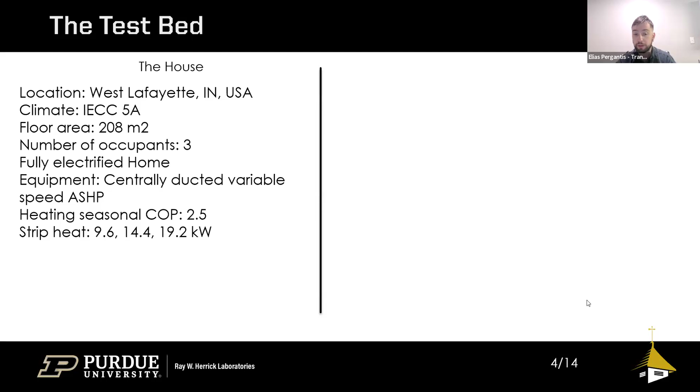This strip heat is used both for defrost purposes and for meeting the building demand. So when you go into defrost, strip heat is energized to meet the building load while the system is running in cooling mode. This is the house, and I'm sure some folks will also visit it over the weekend.

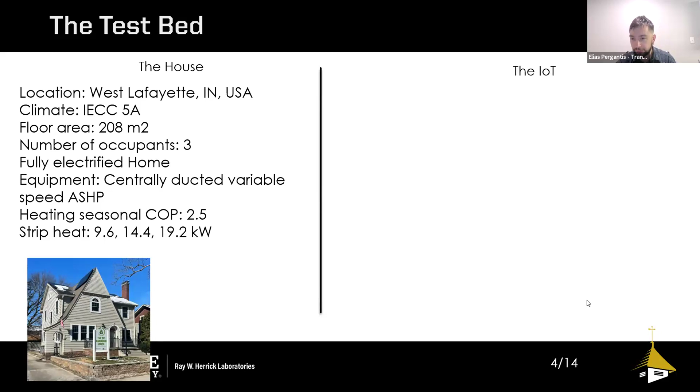In terms of the IoT infrastructure, these were the 3 main systems we used for the study. For training purposes, you really only need the electrical data and the thermostat measurements.

We had current transformers in the breakers to monitor all the different subcircuits via IoTaWatt. We had this Trane thermostat that reads humidity and temperature at a central location - this is the living room of the house, and I should say this is not a zoned building. We also had thermocouples and airflow sensors used to understand more broadly the thermal response of the building.

Those are intact. Once you have the sensors, we used Raspberry Pis for some of these, but for others, just through direct API communication, we were pushing the information to InfluxDB on an AWS server. This was used for data storage.

In terms of actively controlling the system, we could have run the optimization remotely on the server as well, but for monitoring and other privacy and control purposes, we ran this on a local computer, which solves the optimization problem and sends a set point for this specific problem. We've done other studies with water heaters and EVs, but for this specific study, it would decide the set point and push that to the thermostat.

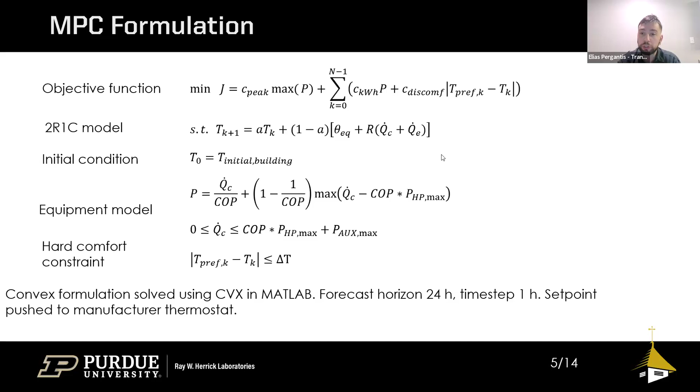We have a term for people's activities and model accuracy and other error terms all lumped into an exogenous term, and that's a support vector machine as a function only of outdoor conditions. In reality, it should really be a function of both indoor and outdoor conditions, but to maintain linearity and convexity, we have it only as a function of outdoor conditions. And that does improve model accuracy in capturing some effects such as solar gains and other things that we don't explicitly model as part of the main equation.

In general, we found that we were able to train the core RC parameters with significantly fewer days than this, but really we needed a longer period of time to train the machine learning portion of the model.

Especially because, I should mention, the occupancy - the reason we didn't use occupancy as part of the optimization is the house is more or less occupied at all times. It's not like a typical family home where maybe the people leave during the day and come back from work. Instead, we have occupancy most of the day.

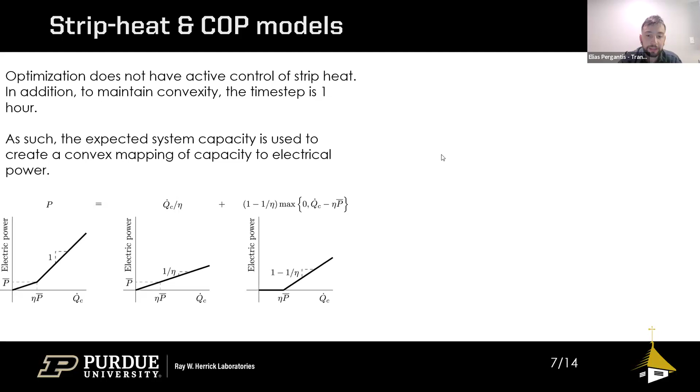In order to do that, we use the expected system capacity to create this mapping from thermal capacity to electrical power, and basically this is how it looks. We look at the heat pump portion, and then after the heat pump portion, we assume that the system is operating at strip heat power, which is at a COP of 1.

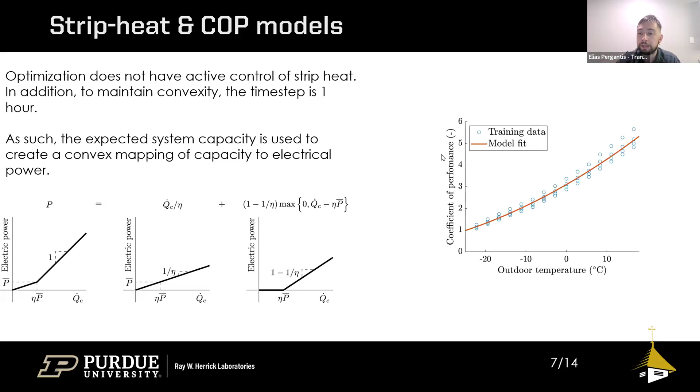In terms of the COP of the system, this is purely a function of ambient temperature, and we can see how it looks. The variation from the points is because of different indoor conditions. So we can see indoor temperature definitely does have an effect, maybe 10 or 20% COP difference, but the main trend is driven by the ambient temperature.

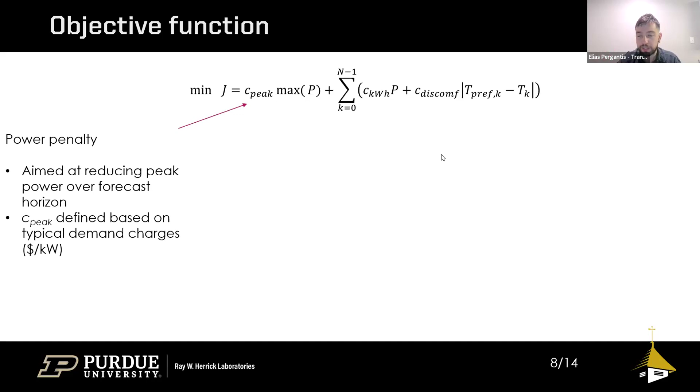Now, in terms of the objective function, we briefly covered this before, but we had 3 terms. First, the power penalty - this is not a real penalty that the utility has in place. It's based on typical demand charges, and the units are dollars per kilowatt, aimed towards softening the power profile of the system. Then we have the energy.

This is aimed at reducing the total electrical energy consumption. It's dollars per kilowatt hour, and it's defined based on local electricity prices, and it's a flat rate. There was no time of use present.

I believe it was, during the time of testing, $0.14 per kilowatt hour. And then lastly, for the discomfort, the absolute term is there in order to avoid deviation, both upwards and downwards, from what the homeowners really want. And the units are in dollars per degree per hour.

And the optimization basically needs to balance these three terms, and it's not trivial - how do you, especially the discomfort price, which didn't necessarily have physical units that we could easily tune.

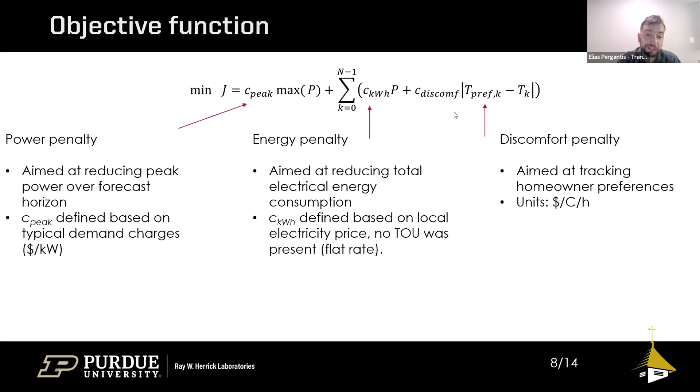To do this, we found that we started with some price, and then we found that generally, as the weather fluctuates significantly at the location, the optimization would not really honor the comfort aspects of the bargain at different weather conditions. So, because if this is tuned at, let's say, 0 degrees Celsius, and then we go to -10 the next day, you can imagine we end up trying to only solve for the energy portion.

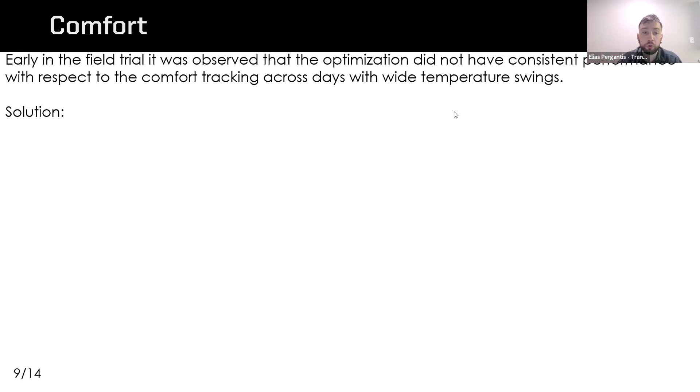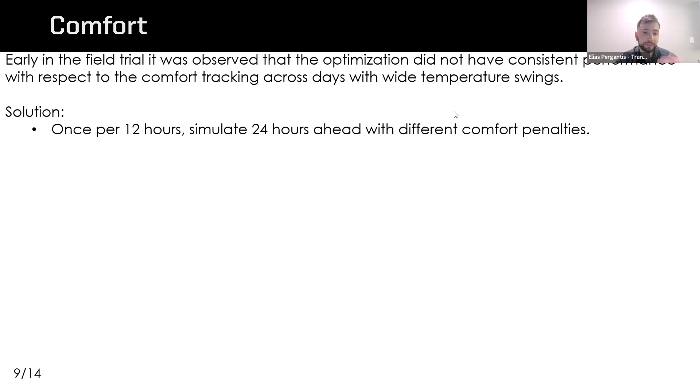So our solution to that: once every 12 hours, we would simulate the system with different comfort penalties, a range of comfort penalties. We can do this quickly because the problem is convex and solves very fast. It allows us to identify thermal comfort prices that ensure the indoor PPD is less than 10%. That's very important, that's generally what ASHRAE uses for comfort.

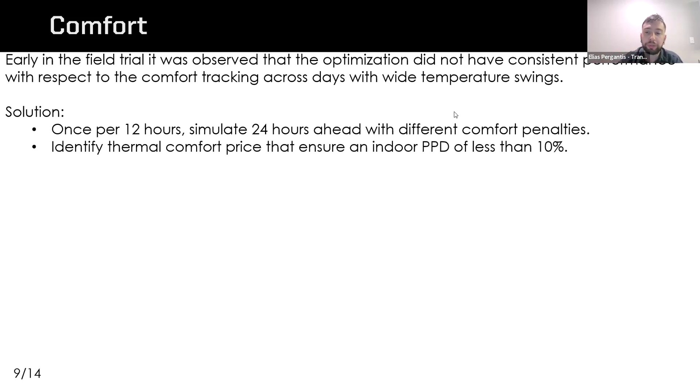We used some sample clothing and have some questions for the homeowners on that. This is how this looks on a cold day. We effectively sweep the thermal comfort price, and we can see the lower the thermal comfort price, the more the savings, but also the more the discomfort. We find the comfort price that ensures the PPD over the forecast horizon is less than 10%.

Likewise, we do this on a mild day, and we can see that the price is much lower, so we have more freedom to optimize. That ensures the controller is doing its best regardless of the weather.

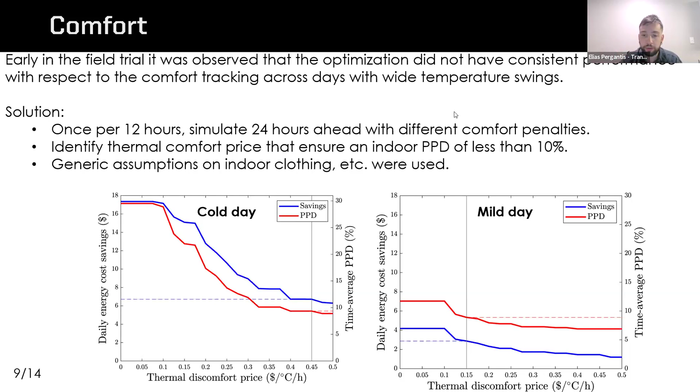How did the controller do? What were the results? I would say the controller learned two different things: one is to prioritize heating at milder conditions, and secondly, to recover from setbacks very slowly. Both of these you could do with a heuristic, and there are also smart recovery algorithms for that.

But a lot of the savings from the algorithm were just from slowly ramping up the temperature over a couple of hours with some homeowner discomfort, but being able to avoid using electrical energy, at least for indoor conditioning purposes, but occasionally for power purposes.

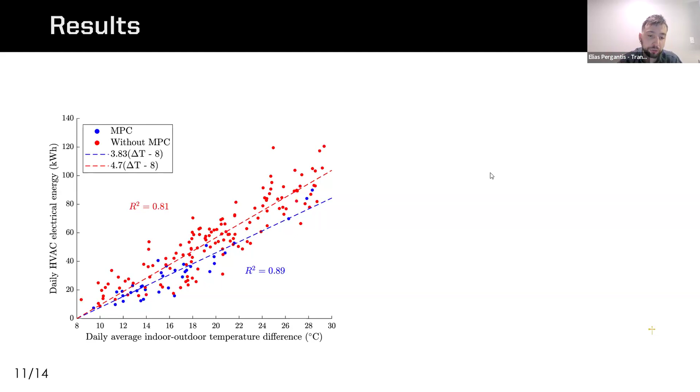Okay, so how did we do? We looked at the total HVAC energy, both heat pump and strip heat, and did a linear curve fit with indoor-outdoor temperature difference. Having some uncertainty in the slopes of these two models, we can do a Monte Carlo simulation of the relative savings between the two cases. And this is what resulted.

Effectively, we had expected savings of 19%, and then there's a distribution, largely driven by day-specific dynamics. The controller doesn't save as much energy on, for example, very cold days, because you don't have a lot of shifting potential versus milder days. That's why the savings vary.

In terms of the electrical power, this is the profile before MPC and after MPC, and we can largely see that without MPC we did use a lot of stage 3 electrical energy, whereas with MPC it's primarily stage 1 and stage 2.

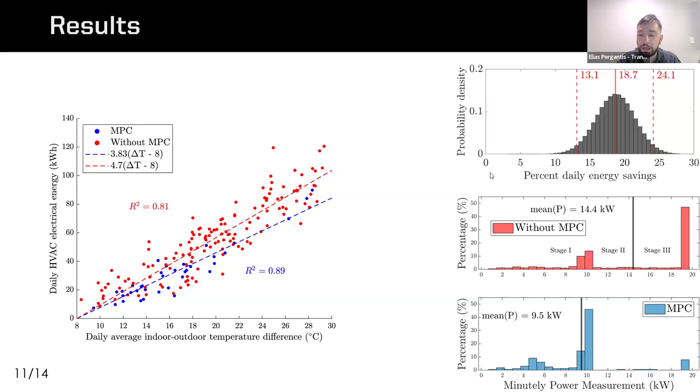Now, going into the summary slides and closing up the presentation, apologies if I'm going fast. In terms of development effort, the total project development time was 190 days, from when I started on this project until the controller was up and running. I should mention these were student days, so having courses and other things doesn't necessarily mean all of these days were 100% effort on this, but to give the rough schedule, the non-repeatable tasks dominated, and those were sensor procurement, server setup, sensor communication, and API related issues.

We did find that the manufacturer's thermostat was difficult to work with at times, and that is largely solved with open source. There are some open source thermostats with available APIs, as well as smart thermostats that allow this kind of features. Repeatable tasks, I would say, were related specifically to fitting the RC model for this house, and those I would say are between 4 to 5 days.

In the non-repeatable tasks, I should also mention the controller development and the model fitting development, but those you would only have to do for one house and they would scale. So the repeatable tasks are the much smaller portion, and they could even further be reduced. As mentioned, the caveat is that this is the first deployment, and there was some learning curve, which should be reduced in future iterations, as it was in other deployments we did.

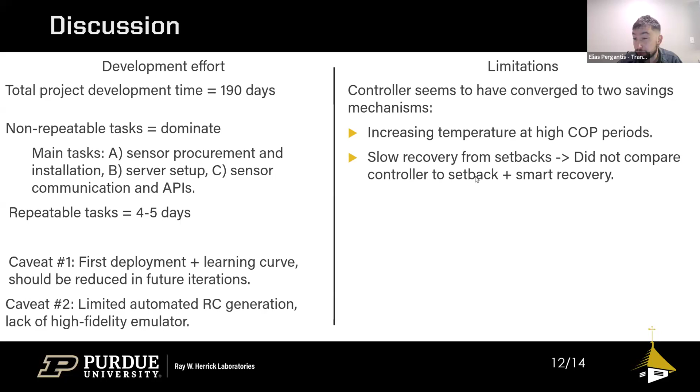This is important because there may be a heuristic there, either on the smart setback side or the temperature side, which we could have tested comparably, but we didn't find something readily available. It's something to consider in the future—some heuristic controller with simple rule sets, and how it would perform with respect to the baseline.

Unexplored effects: we found a significant reduction in the number of defrost cycles. These were demand-based defrost cycles, so the manufacturer monitors the coil temperature before triggering a defrost cycle. That was actually one of the main reasons we reduced electrical consumption, especially for the high stage strip heat.

We really couldn't understand this when the experiment was concluded, but we do have a physical explanation now.

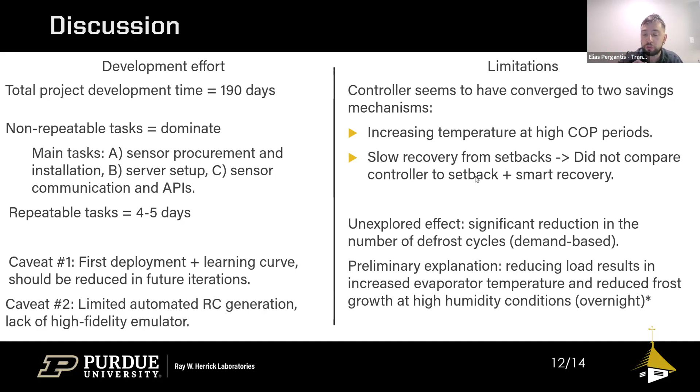Generally, reducing the building load results in increased evaporator temperature, which in turn means we spend less time below the dew point, and we don't transfer as much frost, especially at high humidity conditions, namely overnight. So when we do the setback, that helps significantly in reducing the number of defrost cycles and frost growth in the unit. That was something we found surprising and worth exploring further.

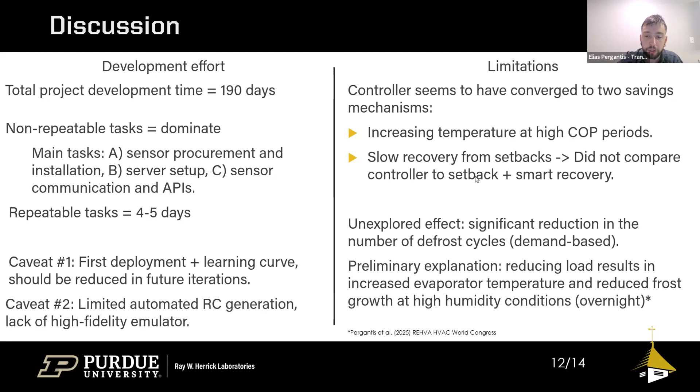Okay, so that's the end of my presentation. Apologies for going a little bit fast.

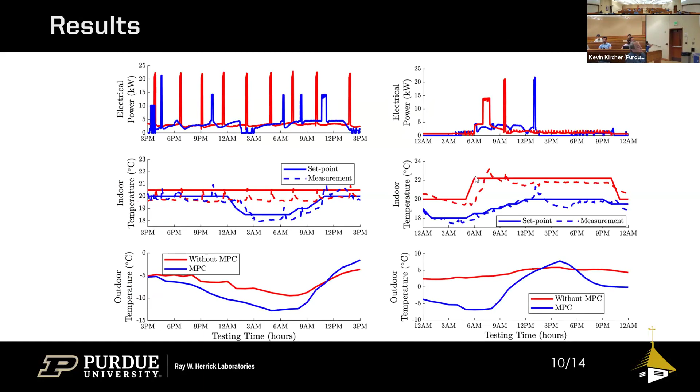Go ahead, I have one question. Can you go back to slide 10? I saw you show some time series comparison between the baseline and MPC. I'm curious what period you chose to compare these two, because if you wanted to make a fair comparison, the baseline and MPC should have similar or the same weather conditions.

Elias, did you hear that question? So the question was, how do we normalize and compare the controllers across different weather conditions? Yeah, so the way we do this is we look at the daily average indoor-outdoor temperature difference, as shown in this slide. That's a good metric to understand, because heat is driven through conduction between the indoor and outdoor environment. So the delta T is a good measure for normalizing for both the reduced demand from having the temperature a little milder, as well as the difference in the weather.

We could have also just normalized by the outdoor condition, but then the savings of the controller would be a bit further exaggerated, because it wouldn't account for the fact that the temperature was a little milder during the time of testing than with the historical data.

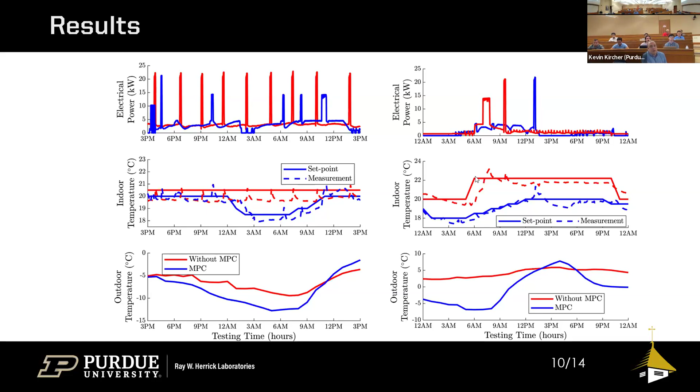Thank you for your presentation, it's very good for me. My name is Nam, I'm a PhD student from University of Central Florida. I have a question about the modeling part—here you're using an almost linear gray box model, right? I've been working on physics-informed machine learning and neural networks, so I have a comparison paper between physics-informed machine learning and gray box modeling, and I found that physics-informed machine learning has a more accurate model. Have you tried this model in real-world systems, and how do you see its performance?

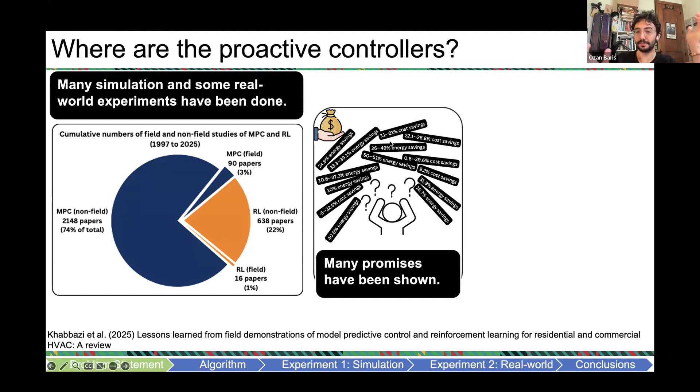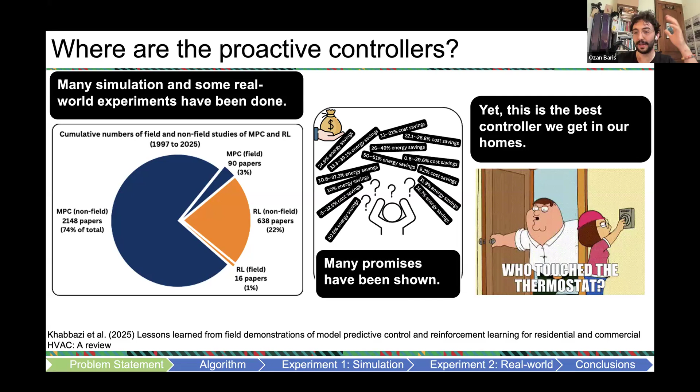Many promises have been shown. You name the number, we can probably find it in there. Yet, most of the controllers we see in our houses are still quite simplistic, right? It's like PID, rule-based, or you are not even allowed to touch it. So we need more scalable controllers. I think that's where we were headed.

And 2 main paradigms here have been model predictive control and more lately reinforcement learning. Between these 2 paradigms, there are works that lay in this gradient. Some of them are black box MPC variants, right? Or some of them are model-free RL, which is on the right-hand side of the spectrum, but that mostly requires a simulator to train.

We started with differentiable MPC, which, unlike these methods, enables end-to-end learning of dynamics and a control policy. Again, this is more of a hybrid method between the two. Gnu-RL, which was a work in my lab done before I was there, advanced this by implementing online learning on top of the imitation learning differentiable MPC has.

So actually this whole thing started by me thinking, can I just take Gnu-RL and put it in this house? Well, there were some problems. Its model was linear with no RC parameters you can infer from, and it had to work with a quadratic cost function that you had to manually tune.

Because of these limitations, we ended up building Ibex-RL, which is the RL implementation we ended up doing in this house. Let me just try to summarize Ibex-RL in one sentence.

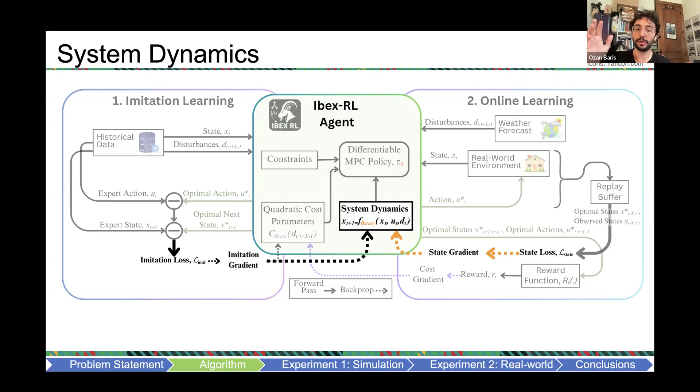In online learning, there's not really an expert action anymore, so you actually start using only the state gradient to update this model. What we call state parameters are again the parameters of the RC network.

I think I already mentioned this. In the imitation learning, we minimize state and action loss. In online learning, we minimize the state loss.

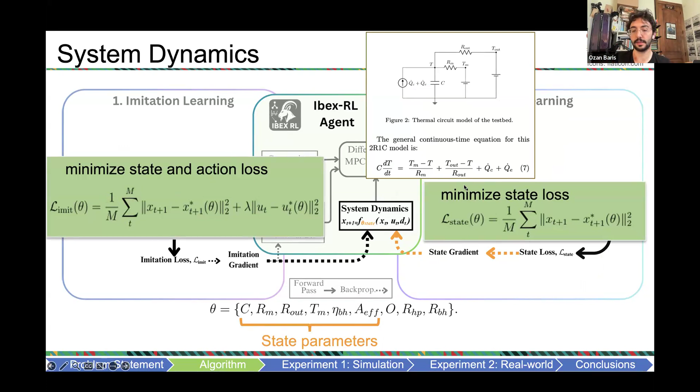The cost approximation we do, again, in the first stage, you fit the quadratic cost parameters of the internal solver using an action loss. But this limits us — it gives us a suboptimal yet somewhat safe starting point. But the objective function MPC had was not quadratic.

So we had to come up with a way to make this internal quadratic solver work with a non-quadratic reward function. What we ended up doing is using the gradient of the cost function the MPC had, just the negative of it, to make it a reward. Using that gradient, we kept updating the quadratic cost parameters to come up with an approximation of the quadratic cost parameters that will maximize the reward, which again is the negative of the objective function of MPC.

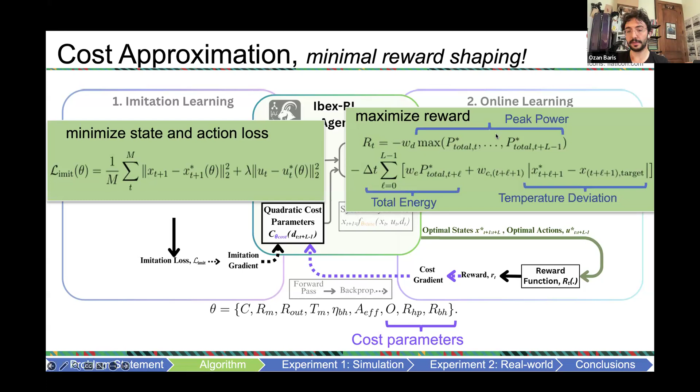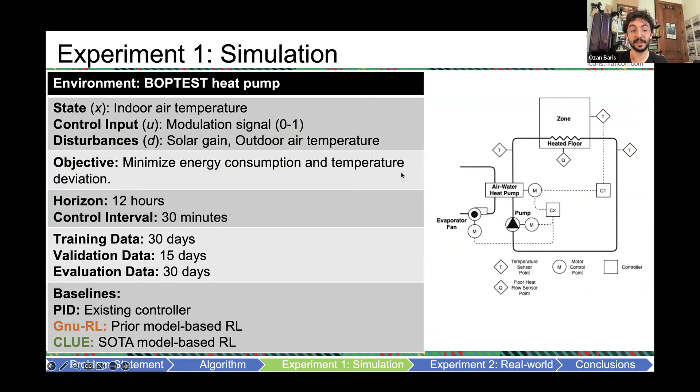Elias already talked about these parameters, so I'm not going to go over the objective function again — it's almost identical. The first experiment we did was in simulation, but I'm assuming we're more interested in the real world, so I won't talk too much about that. We used BOPTEST, and it seems Ettore is going to be talking about BOPTEST after this one, so pay attention — BOPTEST is really good, very useful.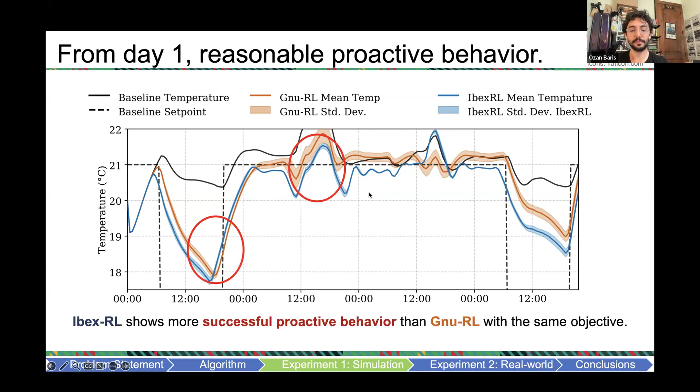What we saw in simulation was that from day one — the day it started being deployed — we see some proactive behavior. Not surprising, because after all this is a model-based reinforcement learning algorithm. We also see that it does a better job making use of the heat during the midday period. Overall, compared to the Gnu-RL we built this on top of, IBEX RL does better.

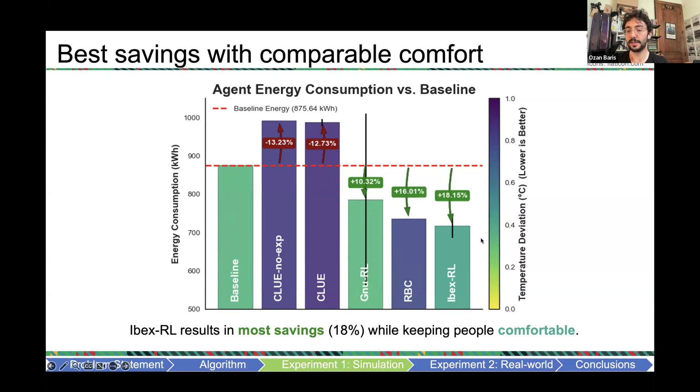We then compare it to some other methods, such as Clue and some rule-based controllers, at different comfort levels. Overall, what we see is that IBEX RL achieves the most savings while still keeping people comfortable, which is what the color coding here shows.

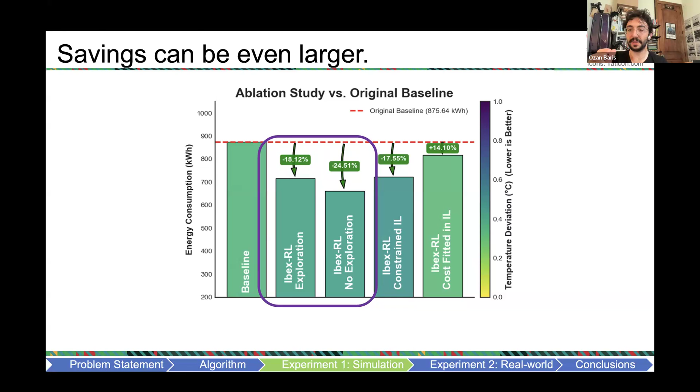But savings could be larger. We did an ablation study and saw that without exploration you get up to 25%. The motivation for exploration, though, is that it makes your state loss go lower over time. In the beginning exploration harms you, but then it provides more savings down the line.

Is that really the case, though? We did an analysis on that and saw that's not necessarily the case. Exploring more did not really provide any benefits to the RMSE we see for the system dynamics model. So there's more research to be done here, is what I'm saying.

So now let's talk about the real world experiment. Again, it's the same house, and the state disturbances are all the same. As the control input, we use power like MPC, but we translate that to a set point by using the next state temperature prediction, because we cannot control the power directly. Everything else is the same.

But before going forward, I think at some point some of you may be wondering why we're not using soft actor critic, why we're not using DDPG.

There are other residential RL deployments out there, but besides the first one, which did not train anything and was a simpler environment, the other three require the simulator to train.

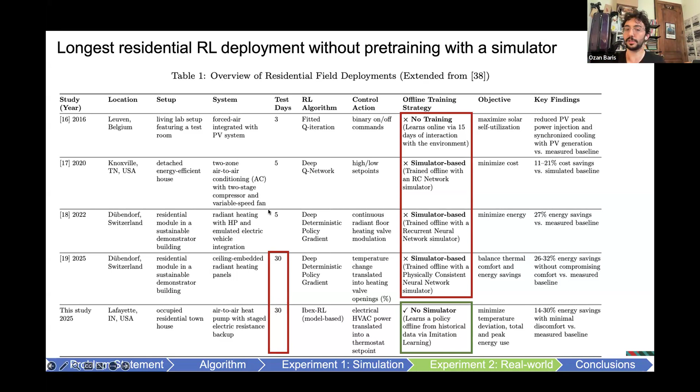But we didn't want to do that because I think for RL to be somewhat scalable, we should be able to start without having any simulator to begin with. So that's why we went ahead with this approach, and this is again one of the longest residential RL deployments out there as well.

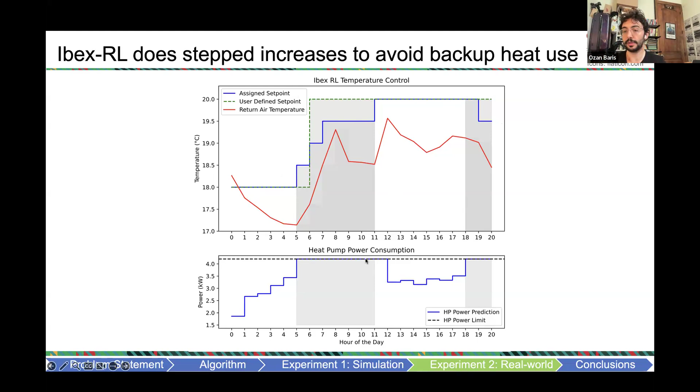The savings for IBEX RL also come from a similar point of view as MPC, where most of the benefit comes from either doing stepped increases when the user-defined set point changes, or gradually reducing set point before going into the nighttime setback. As you can see, this caps power consumption at the heat pump power limit and avoids turning on the backup heat, which was the main source of savings.

Overall, when we look at the savings between these three algorithms by doing linear fits, we see that IBEX RL and MPC achieved almost the same number, 21 and 18, all within confidence interval. So we shouldn't say one is better than another here.

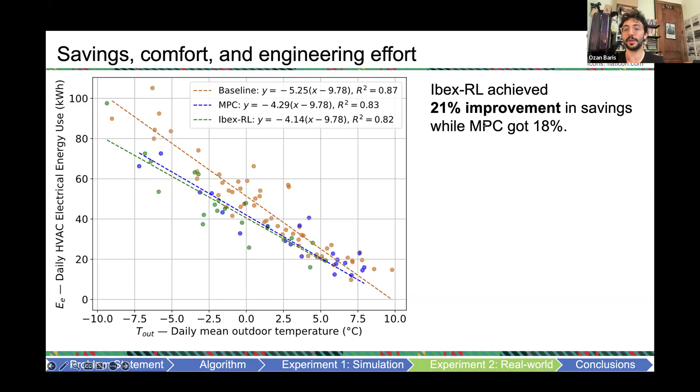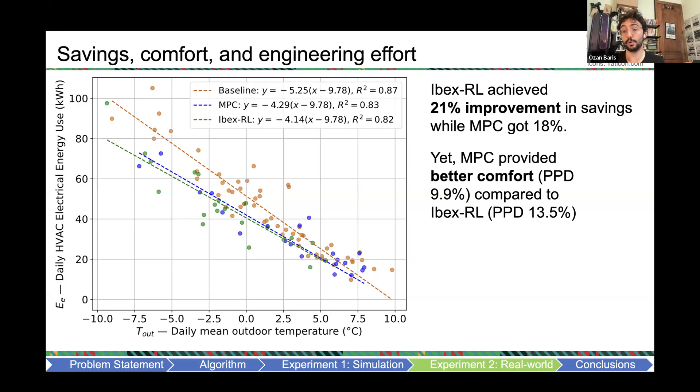Yet it is clearly better for MPC in terms of comfort. MPC had better PPD values, around 9.9%, while RL had 13.5%. Part of this was because of the initial adaptation period where RL was still learning the cost parameters, and especially during those few days, it assigned colder set points.

Lastly, we make some vaguely educated guesses on how much it would take to deploy these algorithms in new houses. If they don't have this IoT setup Elias was talking about, we are assuming that would take around 4 days or so for both algorithms. After that, we estimate 2 days of configuration work for RL, while 5 days of configuration work for MPC.

But ideally, all of these numbers should be zero, because if an HVAC company were to do this, they couldn't afford an engineer. People couldn't afford an engineer from an HVAC company coming here and spending 2 or 5 days of their work into this model calibration period.

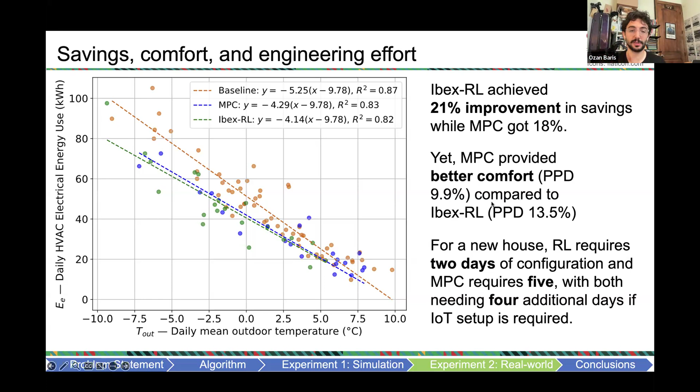Overall, we saw that IBEX RL had up to 25% savings in simulation. Real-world experiments show comparable savings, but MPC had better comfort. We are estimating IBEX RL to require a little bit less engineering effort by automating some of these model fitting steps and using operational data for imitation learning.

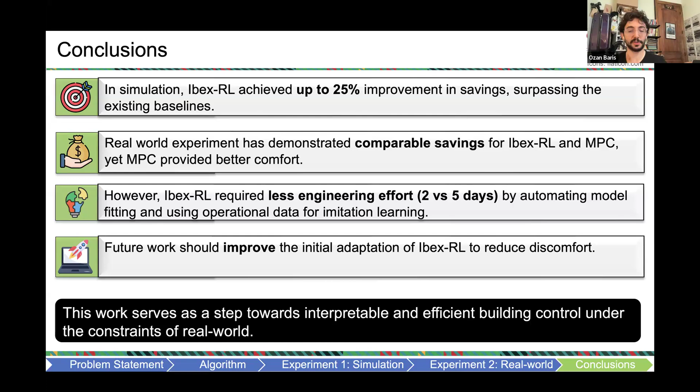But we still see that the initial adaptation of IBEX RL caused some discomfort, which future work should try to address. Overall, we work towards achieving interpretable and efficient building controls, and that's about it. Happy to answer any questions you may have.